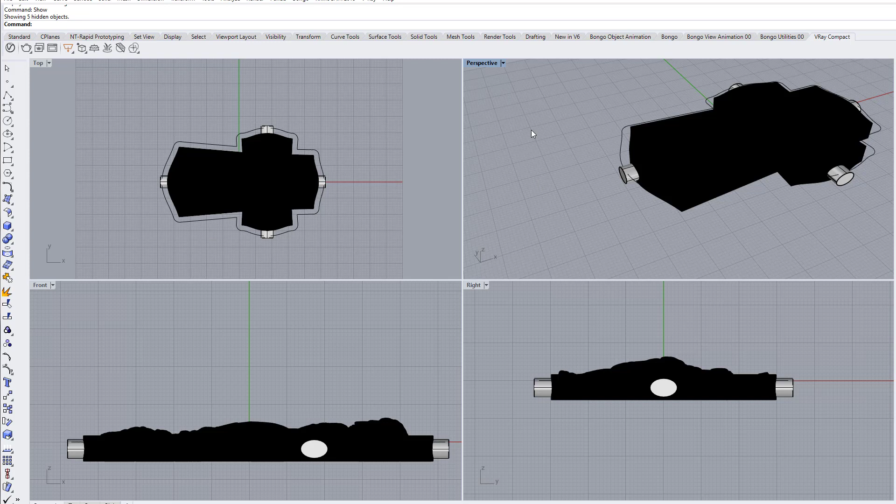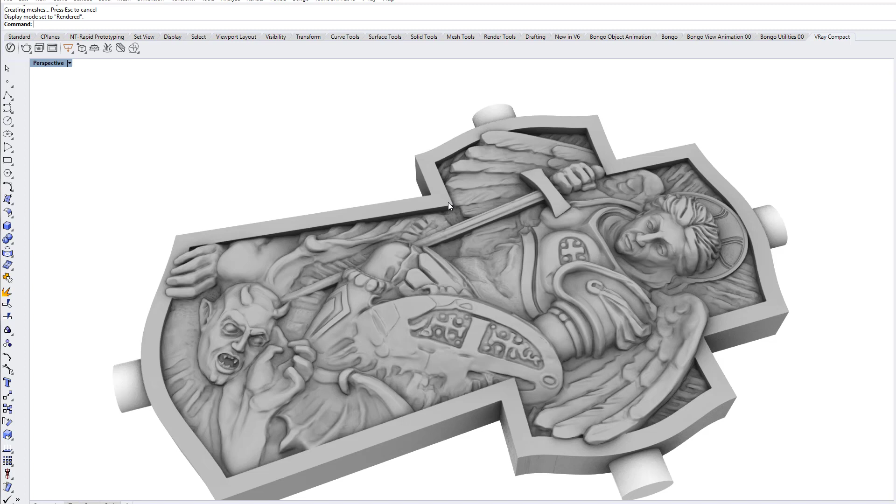What we're going to do with this is we're going to move it into DeskProto and we're going to be cutting it in wood. So we've got to understand how we prep the model and also the reasoning why I use the curves here instead of DeskProto, but I'll show you how to get them in both places. So if we look at what I've prepared, you've got the actual model. Now beware, it's massively huge because of taking it through 3D Coat.

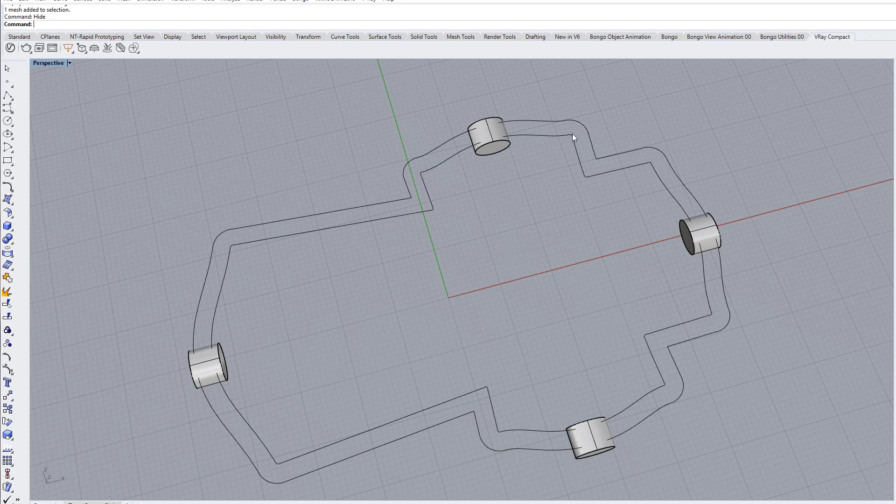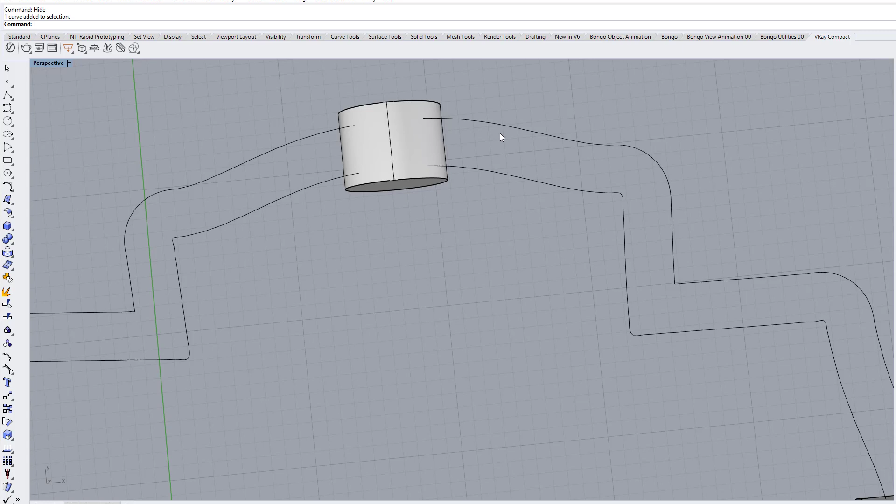But if I hide that down, inside Rhino I used the mesh outline tool in the top view to generate an outline of the mesh for me. We're going to use this once we get into DeskProto for doing the fine cutting contained within one border. You'll understand a bit more once we get to that step. I've then also created an offset curve at 3.2 millimeters because the cutter I'm going to go in with roughing is 3.17, and I want that cutter to be able to get down underneath this part.

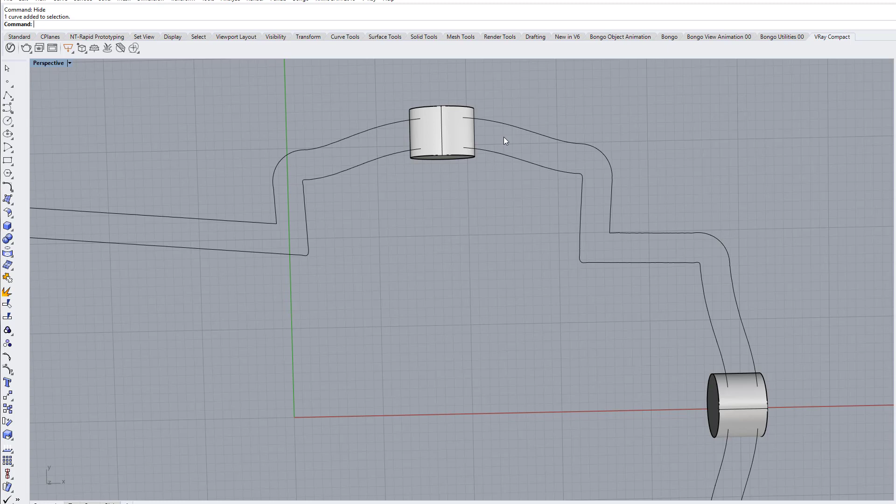The last thing I've done is remembering that you're going to have a block of wood, say this big, on the mill table, and when you're cutting this part you don't want it to fall out if you were cutting in a rotary. In this case I'm not cutting in a rotary, I'm going to cut this in one direction. It is wood, so I can sand the back off, but I'm going to put it in there for illustration purposes. So those would be the supports, similar to how you understand printing supports.

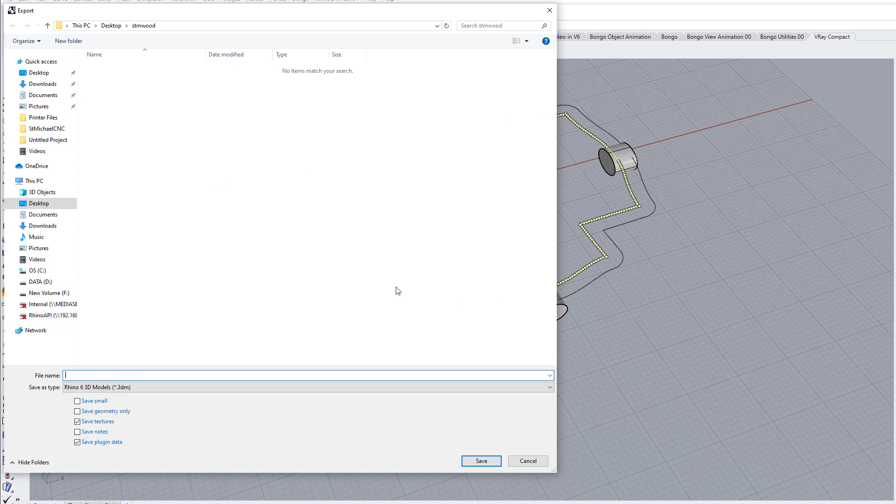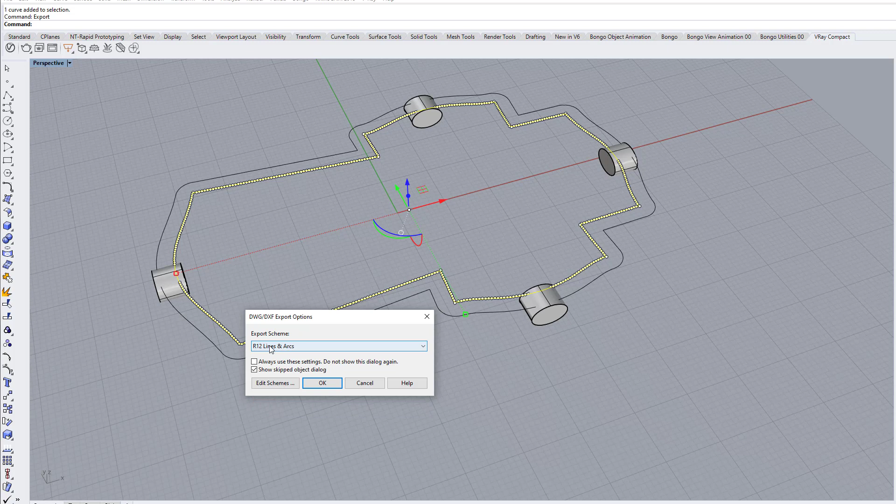Alright. And when it comes up, look for R12 lines and arcs in the export formats. They all pretty much work, but that one seems to give me less problems. Alright, so that's the fine cutting curve. It's exported, and then we're going to export that one. And we're going to call it the rough curve. And we're going to export that one.

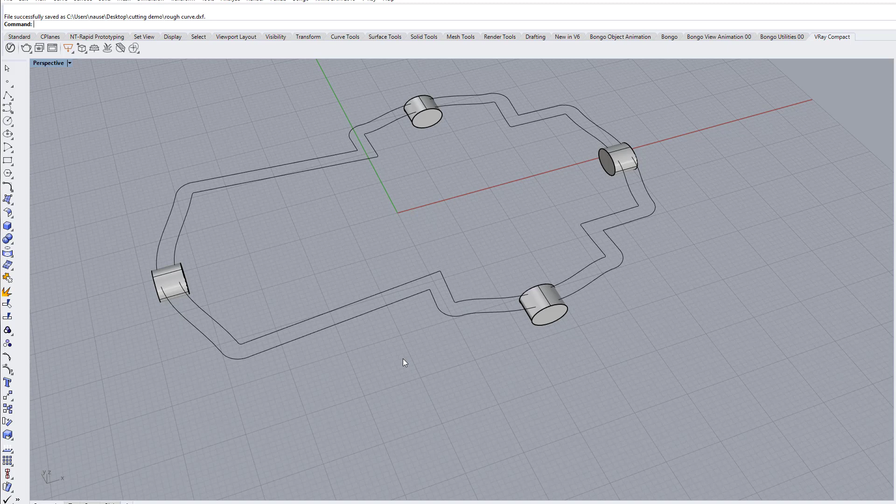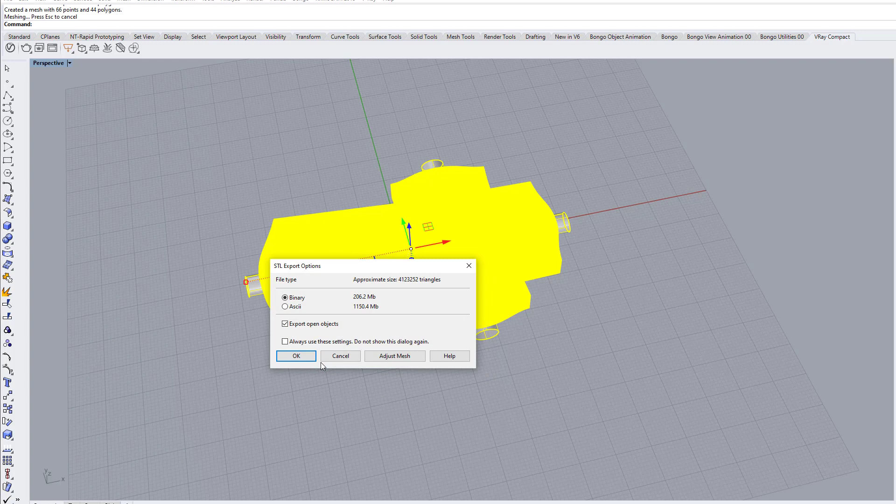Then I'm going to show the geometry. I'm going to select the curves, hide them. I'm going to grab all of that and export the model. Now you want to export as STL. STL, where are you? There we go. And I'm going to call this model. As you can tell, 206 megs of mesh. It's a lot of mesh.

Now you'll be asking me why I'm not using my RhinoCAM for this. When I'm cutting Rhino geometry, it seems to work fast, but when you're using something with a lot of mesh like this, it can be very, very slow. I tried to path this in RhinoCAM before, and after 7 hours it hadn't finished pathing even the roughing cut. So I just abandoned it and I've moved to DeskProto. Highly recommend for this kind of work you get DeskProto.

Okay guys, I'm going to move over to the DeskProto part and save this video out.